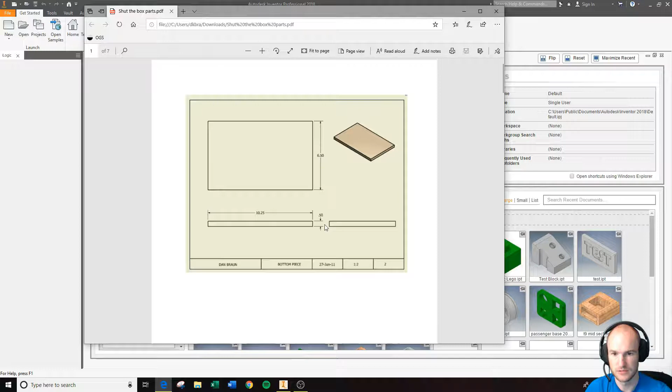So the shut the box, if we were to look at the files for this, we're going to start with the base, and the base is going to be drawn on this face to start with.

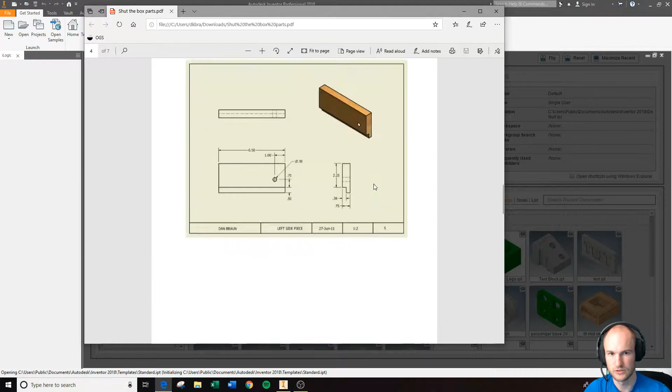We will go back, I'm going to go to New, Standard IPT, and we will begin. Now, as we're going through this and it's loading, we've got 7 parts, so we will go through this as quickly as we can. Here we go.

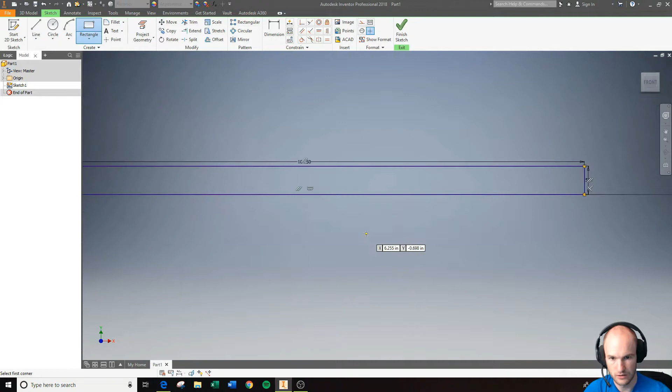We're going to start by making a 2D sketch, and we're going to draw a rectangle in here that is 10 1/4 by 1/2 inch. So I'm just coming over here, 10.25, and I'm going to hit tab, and I'm going to do 0.5. So right there, I got 10 1/4 and 0.5.

After I do that, I'm going to hit finish sketch, and I am going to extrude this 6.5 inches.

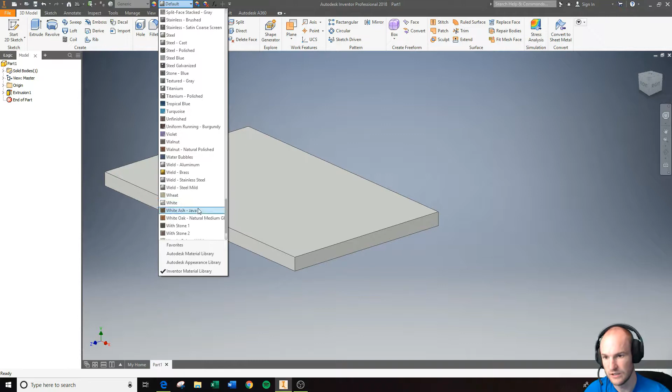I'm going to name this file bottom piece. I'm going to change the color here to wood, and we'll just go with white oak. That's fine. I'm going to save it in a new folder.

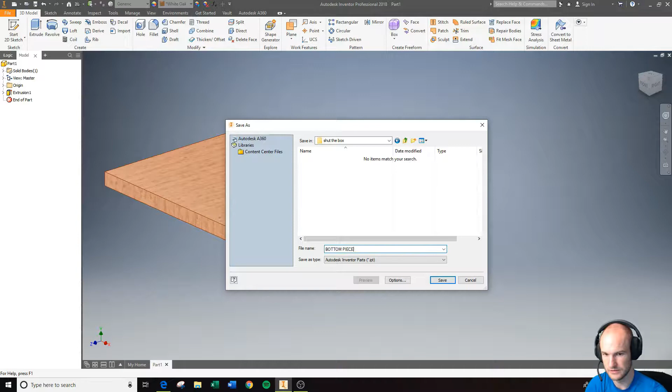I'm going to save this as shut the box, and this will be the bottom piece. I'm going to save it as all capital letters, bottom piece. Once you save the bottom piece, you can go on and make the next piece.

So going through here, the next piece is the long side, which is 11 by 2 3/4. So I'm going to make this piece 11 by 2.75.

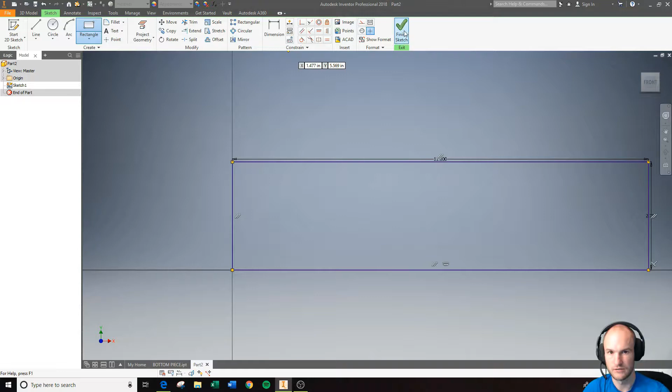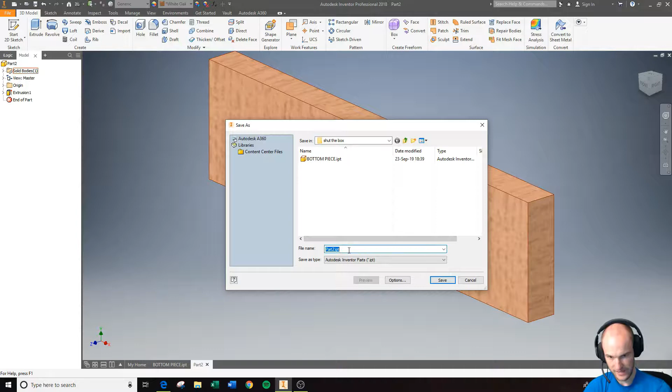So here we go. I'm going to hit finish sketch, and I already know that this is 0.75. I'm going to make this wood again, and we're going to go with the white oak. We're going to stay consistent, so I'm going to save that as long side.

I'm going to start a new piece, standard IPT. I'm going to go down and I am going to do this piece right here, which is the right side, which I will then turn into the left side.

So here we go. We're going to start by drawing a piece that is 6.50 by 2.75. So that's where I'm going to start. I'm going to draw a rectangle that is 6.50 by 2.75.

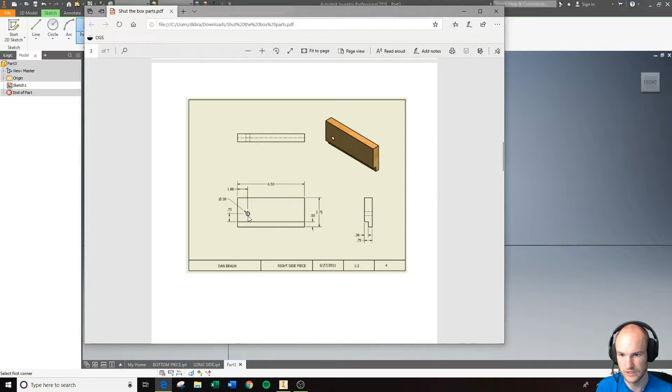Going to hit enter. So I've got that. And then I'm also going to add a hole to this. This hole is going to be, draw my hole, going to be 0.38. It is going to be 1 inch from the side.

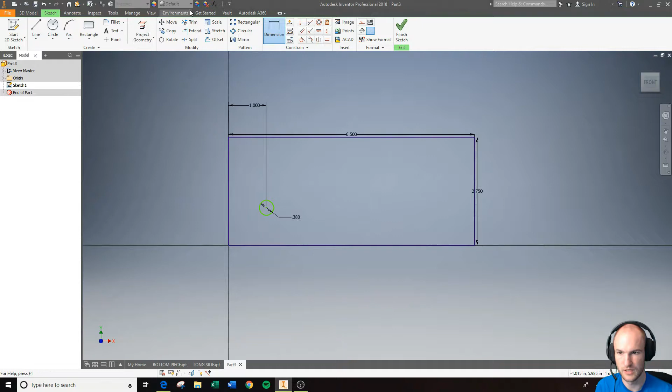And it is going to be 0.75 plus 0.5 from the bottom. So from the bottom it's going to be 0.75 plus 0.5. And the program can do math.

At that point, we are going to hit finish sketch, and we will extrude this out to be 0.75 inches.

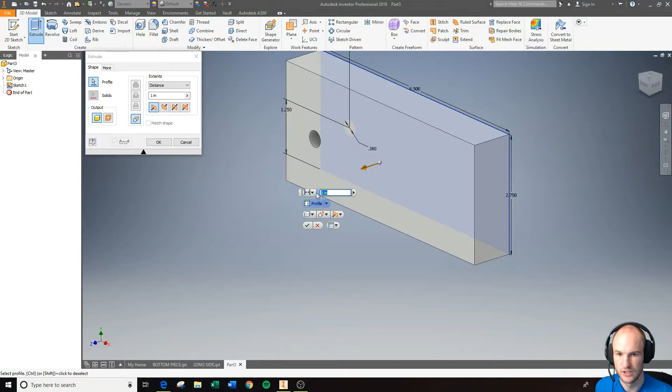Now here's where we decide if it's the right or the left side piece. So if I click on that side there, as I just did, and I draw a rectangle right in the middle, I see that green point that's right in the middle. We can dimension this to be 0.5 tall and 0.75... 0.375. I know it says .38 in the directions, and that is because it is rounding.

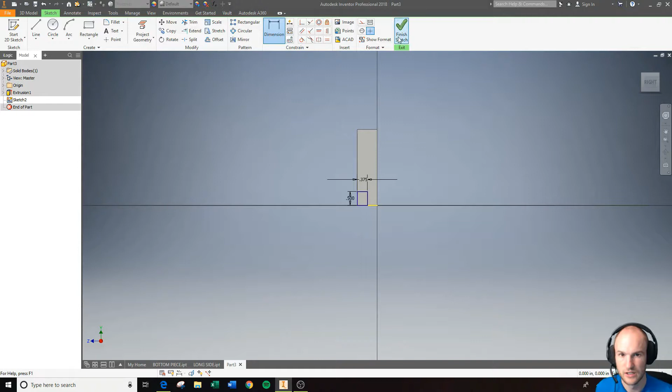We're going to do 0.375, and this is the side we're going to cut out. So that's the side we cut out for the right side piece. So I'm going to hit Finish Sketch. I'm going to extrude cut this, extrude cut it 6.5 all the way through.

I'm going to make this whole piece, might have to do this in 2 steps, but I'm going to go down White Oak, there we go. And I'm going to save it as the right side piece.

Look at our plans, and we look at the left side piece, it's just reversing where everything is. So we've got some options here to fix it. I could either move this hole to the other side, or I can change this.

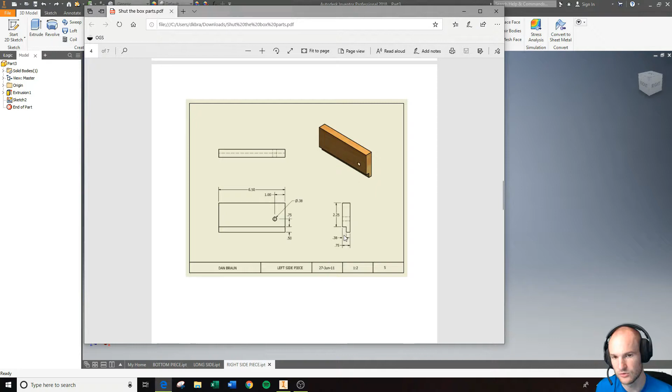But what I think I'm going to do is I'm going to move the hole to the other side. That'll probably be easier. So we'll just stay right here, it's right where we were. And I'm just going to take this sketch right here, and instead of this being 1, I'm going to make this 6.5 minus 1.

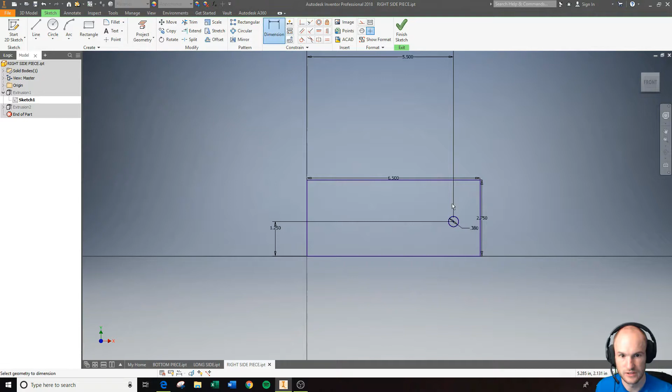Which put it on the other side, which means if I dimension from here to here, we get a 1. So that's all good, and I'm just going to hit Finish Sketch. So that turned what used to look like this piece into this piece. And it was as simple as that.

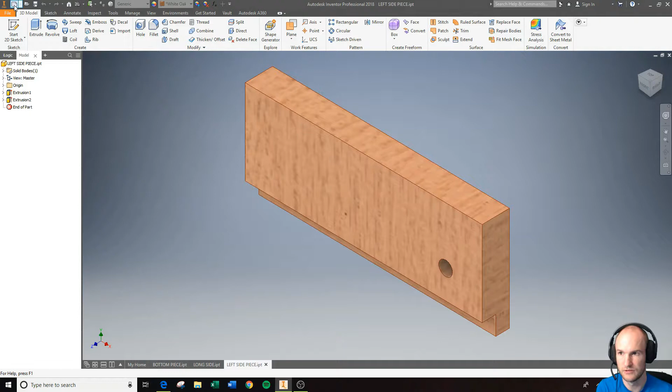So this is very important, we're going to do a save as here. And we can change this from the right side piece to the left side piece. Simple as that. And I'm going to make a new file and see what's next.

So now I'm just going to make the piece here. You do not have to put the numbers on the pieces, but I will show you how to do that. I'll do it for one, and then you don't have to do it for the rest.

So when we're in here, we've got a piece that is 1 inch by 2 inches, and this is 0.75, which is not conveyed. So I'm going to draw it from the side to start. So I'm going to go extrude, and I'll draw a piece here that is 0.75 by 2.

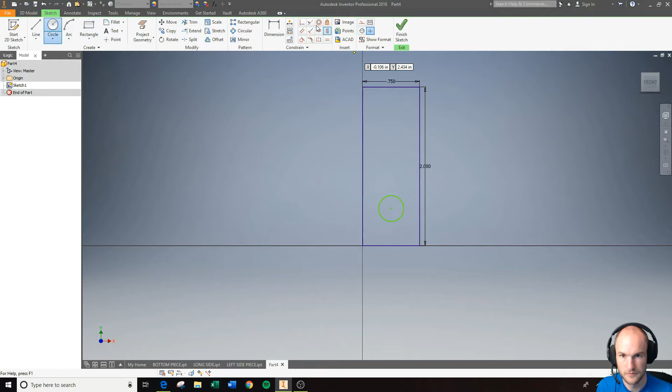There is going to be a hole, so here's a circle. This circle is 0.38, this circle is 0.375, which is fine. I'll leave that there. Even though it says 0.38 here, it's 0.75, and it's going to go up 0.5.

From here to here should be 0.5. And it says to make this hole larger, so we're going to do that, 0.44. And that's to allow the dowel to pass through easily.

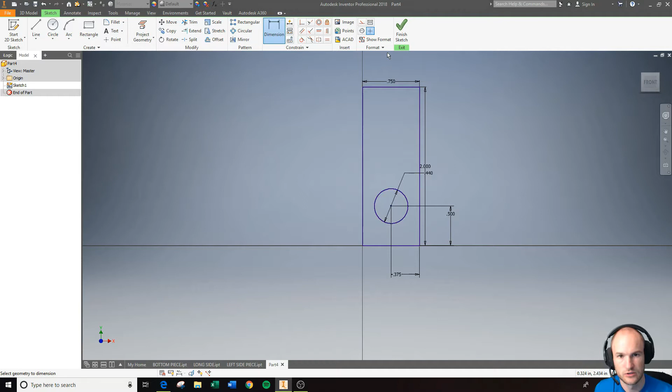So once we finish that, we will extrude this piece 1 inch. And once this piece is extruded 1 inch, you could then save it.

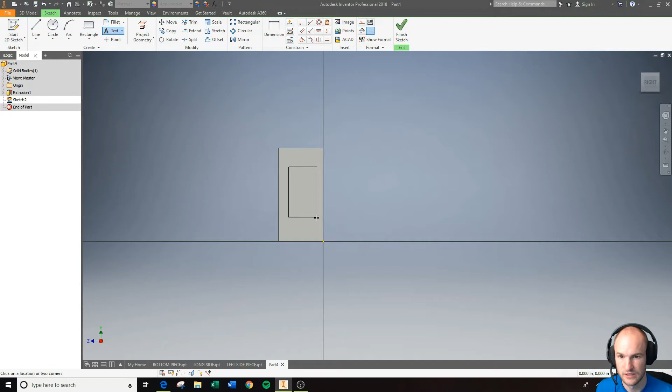Now, if you wanted to add numbers to this, what we can do is we can make a sketch on the front face, and then we could add text to it like so. And we can make the text fairly large, like I'm going to say I want it to be 0.75 to make fairly large text. I'm going to select a font I want, this is really not important, I'm going to go Rockwell, and I'm going to do the number 1.

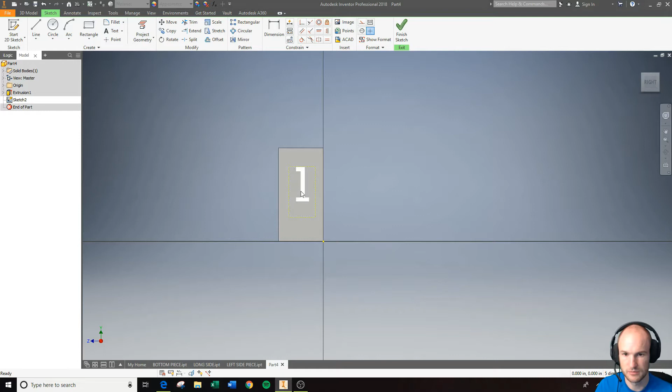Click OK, got the number 1. I then have the ability, once it's in there, if I hit escape a couple times, I have the ability to move it. So if I wanted to, I can move it, get it kind of where I want. And then if you wanted to, you can finish sketch, and you can extrude cut a number in.

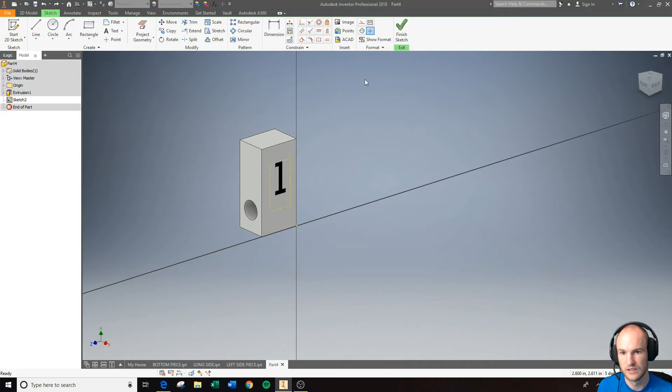That's cut at 1/16. So if we wanted to, we could do something like that. That is totally an extra step, and you do not have to do it at all. I just wanted to show you guys how to do that if you are ahead. So I'm just going to delete that whole step.

I'm going to pick my color, which I've been going with white oak, and I'm going to save that. What do I want to save that as? What are they named as? So I'm just going to call this piece, I guess. And then I'm going to do the dowel.

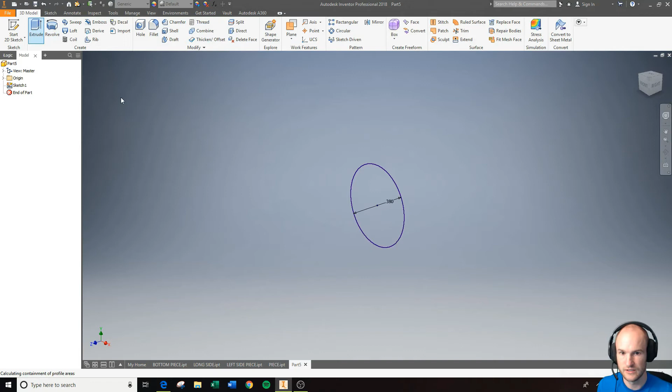So the dowel is 3/8 by 11 inches. This is the easiest one to do. We just grab the circle tool, draw a 0.38 circle, hit finish sketch, and extrude it 11 inches. Done.

And we're going to go down to wood again, get my white oak. I'm going to save this as the dowel.

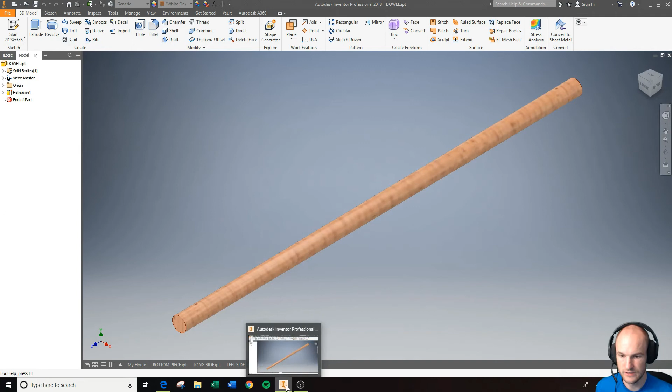Okay, and I think I have one piece left in here, which is the separator. And that is 9.5 by 0.75 by half. So, new file.

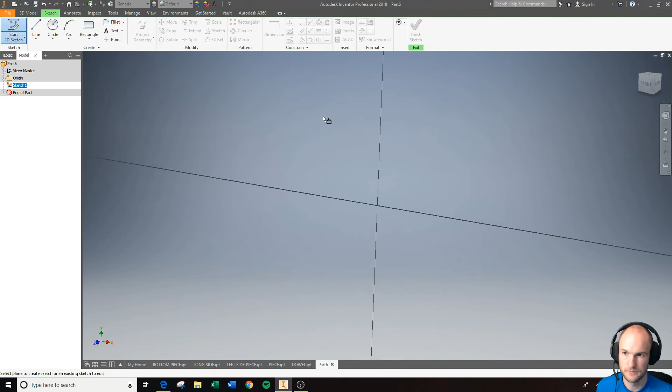We're going to draw it. So rectangle, once again, 9.5, comma, 0.75. Is that right? Yep. So 9.5, 0.75. I hit finish sketch.

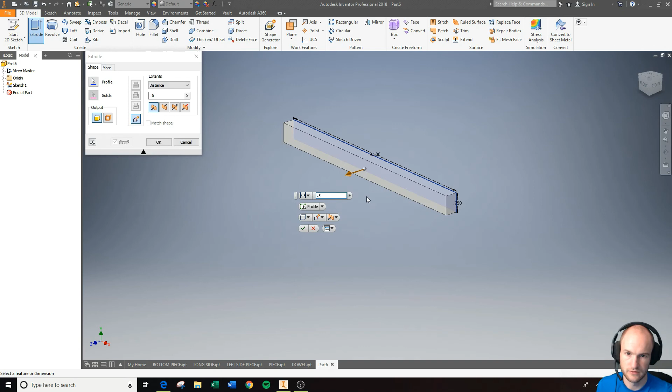And I extrude it 0.5. I'm going to go in here and I'm going to make it wood. And I'm going to save it up as the separator.

And that is all that we have for the pieces. So I hope this was helpful, and good luck.